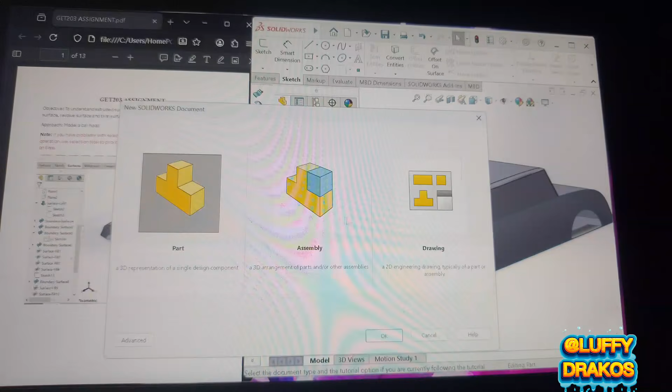So first of all we'll go to parts and click on this, and it brings a new page. This is actually what I'm modeling here.

Using the first instruction here, they said begin with the base, create the sketch below on the top plane. So we're going to click the top plane now, and create this sketch using a center rectangle from here. Click here, go to the center. Now we're going to dimension it.

1800 by 800, because that was what was given here. To use the dimensioning tool, you right click your mouse and drag it up, or you just come over here and click it. So 1800 by 800.

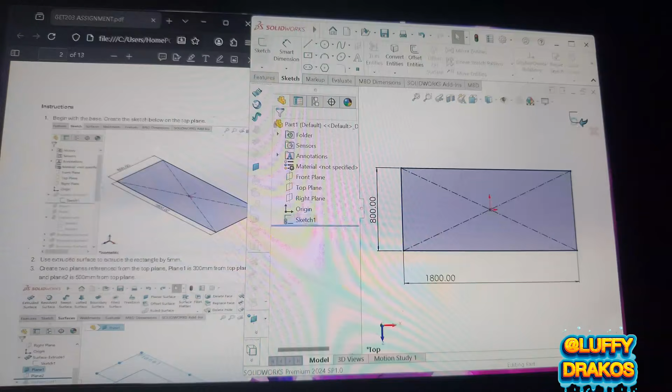Then click OK. Second, they said we should use extruded surface to extrude the rectangle by 5mm. So we're going to use extrude surface. First, exit your sketch, go to extrude surfaces, look at it here. If you can't find yours like mine, you simply go to your search bar menu and search for it. So they said by 5mm, and then you click OK.

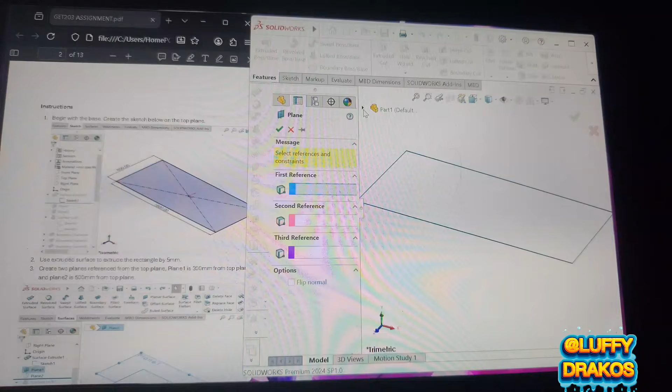Then they said create two planes referenced from the top plane. Plane 1 is 300 from the top plane and plane 2 is 500 from the top plane. So simply go to features, go to your reference geometry. I'm minimizing mine, that's why it's showing an arrow, but yours should just show reference geometry like this. Then you click on the arrow down, you see where the right plane, click on it. Then click on this arrow here, in parts, then scroll to front plane, in top plane rather.

Then see this point here, this is where you put your heights. So the first one is 300, you can just write 300. So this is how it looks like. Then click OK. Then do the same thing for the second time.

They said you're going to reference two times. Plane, this one is 500, so you just make here 200 from the top. So the total is 500. Since the first one was 300, click OK.

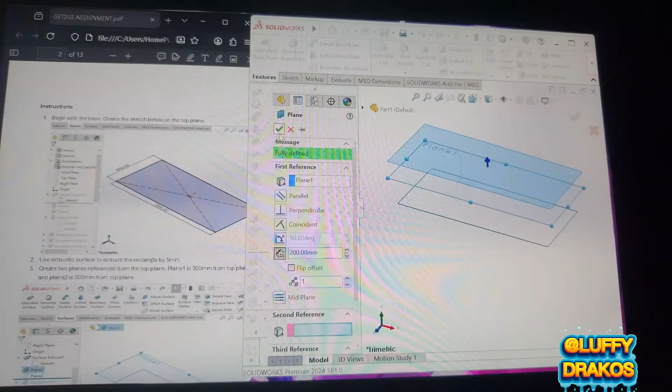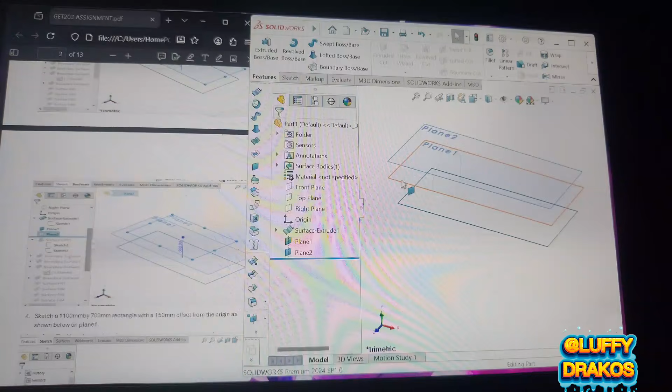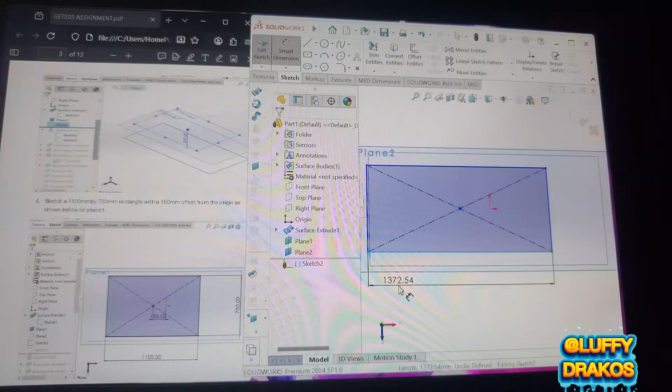So they said we should sketch a 1100mm by 700 rectangle from the first plane, and we should give an offset of 150mm from the origin. So we come over to plane 1. Watch what I did. I click on plane 1, click on sketch, go to rectangle, trace it to this origin. Make sure it's traced like this to make your work easier. So you dimension it 1100 by 700. Then the offset from the origin is 150.

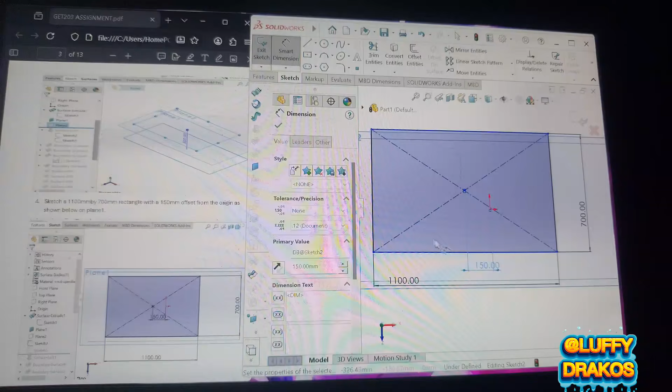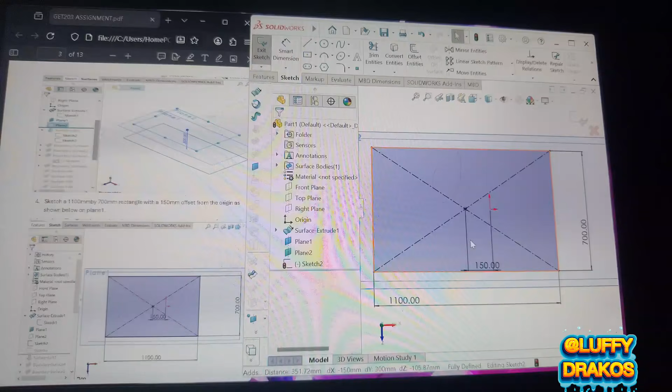Then before you leave, it's not fully defined, you have to make here horizontal. Click on this point, hold your control, click on the second and make it horizontal. Then you click on OK. Now it's fully defined, that's why everything is showing dark. So you simply exit.

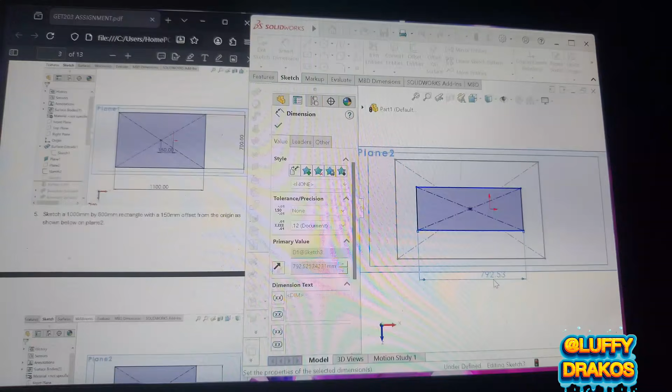And they said sketch a 1000 rectangle by 600 with the same offset of 150 for plane 2. So you simply come to plane 2, click on sketch. Instead of offsetting, since they are the same offset, come to this point here, draw your rectangle. You can stop yours here, then dimension here 1000, and do the other side 600. Let's confirm here 600.

So now it's fully defined. Click here. What's the next step?

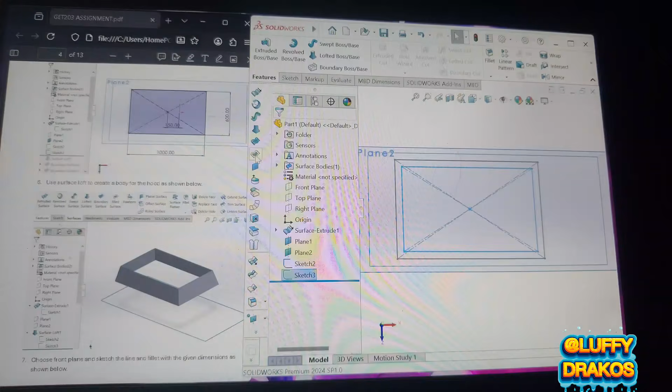So they said use surface loft to create a body for the hood as shown below. So you exit the sketch, go to surface lofts, which is this. If you can't find yours, just like mine, you search for it. Note, surface loft is different from lofted bodies or lofted boss base.

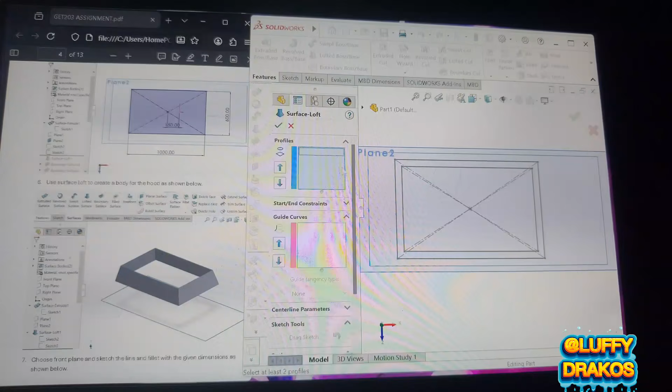So you use this, not that other one. Click here, click on delete this, click here and here only, and you have this. Then you click OK. So this is what you should be having, just like here.

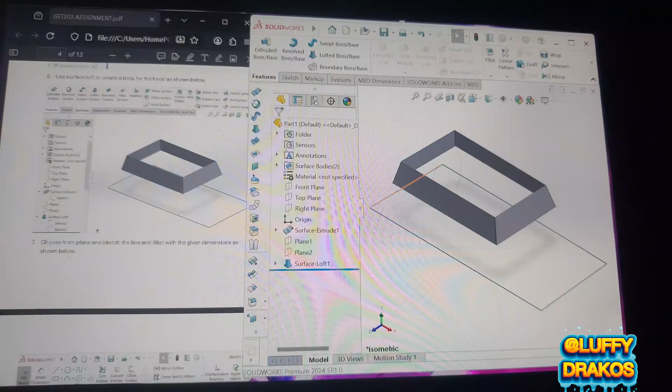So now to make these planes invisible, you just come here, click on them and click on this eye, and they become invisible. So now they said we should choose front plane and sketch the line and fillet with the given dimension as shown below.

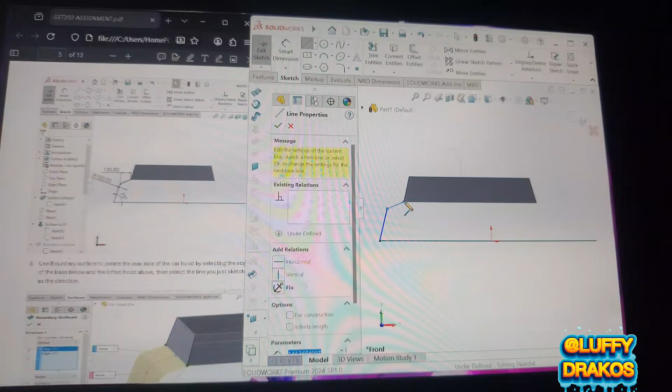So we're going to choose front plane and sketch, and we're going to do this line. I know this is giving a lot of people tough time, so here is the trick behind it. Pick your line tool, or you simply right click your mouse and drag to the left. So you come here, make your hand a little bit slant, then you stop, and then you connect it here. Then you dimension 135 from here to here.

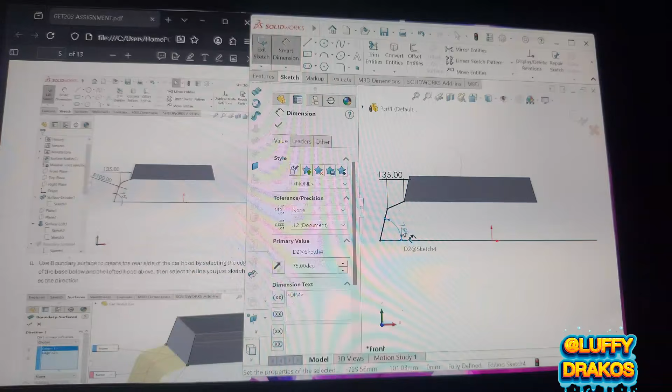And then the angle from here to the base, 75. See, mine is almost 75 though. Then you click OK. Then you come over here, your fillets, click on it, click on this part and make it 100, since it's a radius 100, and we have a fully defined.

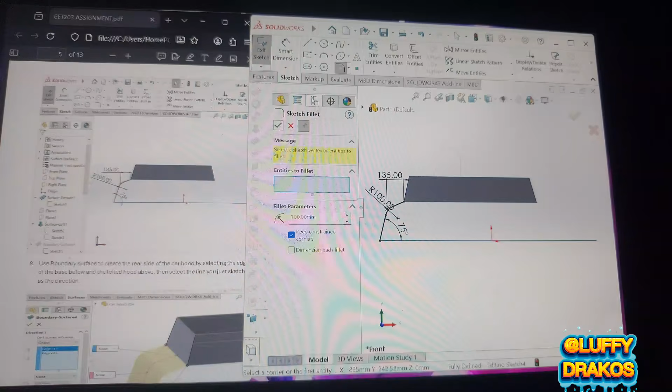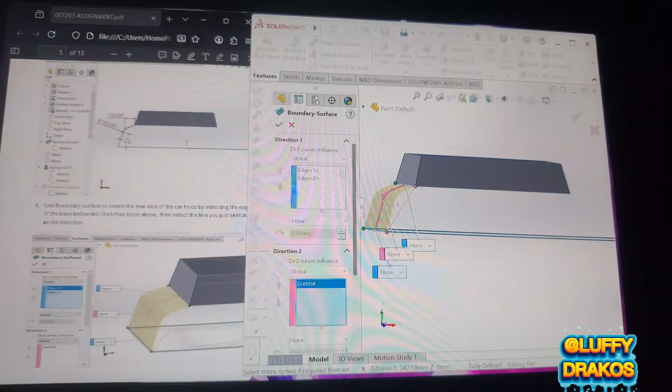So after this, you click on OK, and they said we should use boundary surface to create the rear side of the car hood by selecting the edge of the base below and lofted hood above. So you simply exit, come to your boundary surface and search yours if you can't find it. So you click on both edges like this and click on the line as its direction like this. Let me go over here again, turn it, go to boundary, click here, click here, then click here.

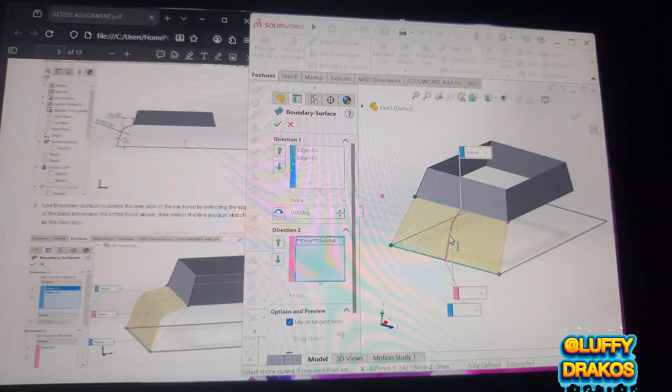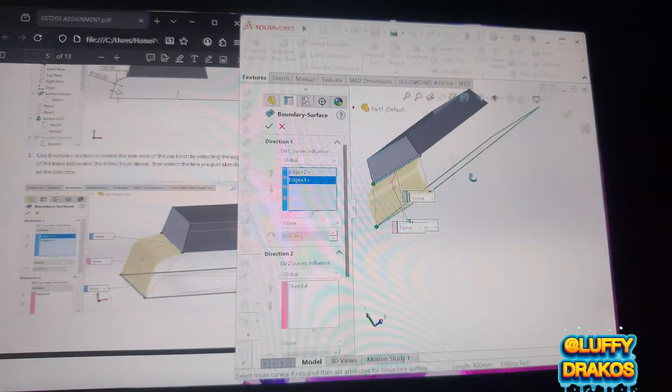So you click on this part for Edge 2, this base part. You have something like this. Then you click somewhere around here for Edge 1, and you have this. And look at what you have. Though you might face some challenges doing yours, why some people might find it as easy, but just try it.

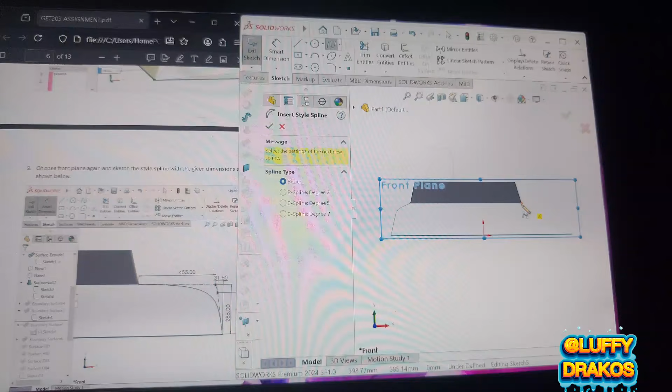Then you click on front plane again, edit sketch. This time we're going to use what they call a style spline as instructed. Then we're going to have something like this from this point. Draw a little bit downwards, click, draw a little bit downwards again, click, then final one, connect it here. Then you click on the escape key on your keyboard to escape it.

Then you start your dimensioning. I advise most times we start with the 31.5 from this point to this point, 31.5. Then the next one 285, which is from here to here, 285.

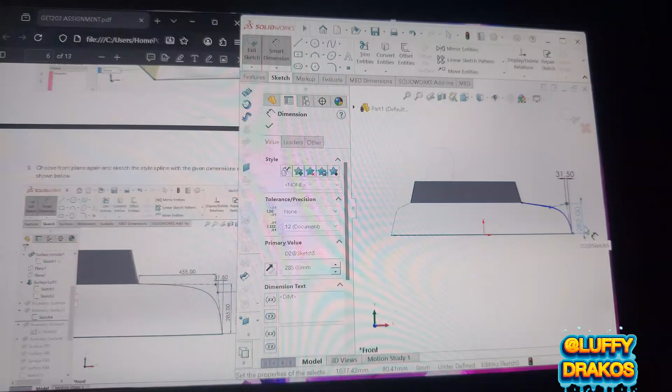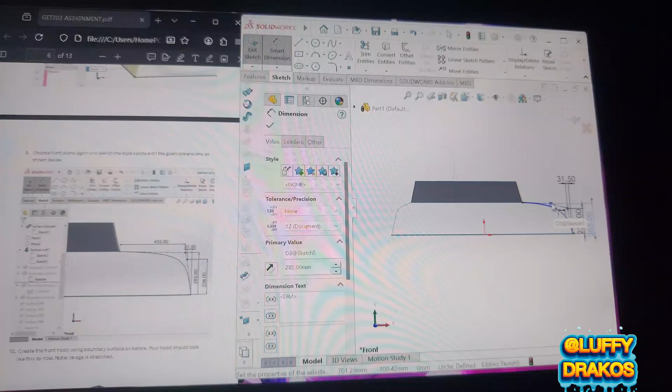Then the next, okay, 285 is not there, it's 238. 238. Then 285 is from here to this high one, 285. Then the final one 455 from here, or let's do from here to here, 455. And there you have it, fully defined.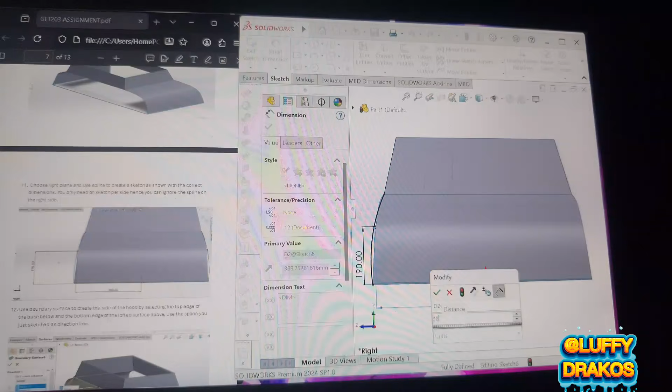So now dimension from here to here is 190. And from here to the origin is 388. Yeah, fully defined. So head over to...

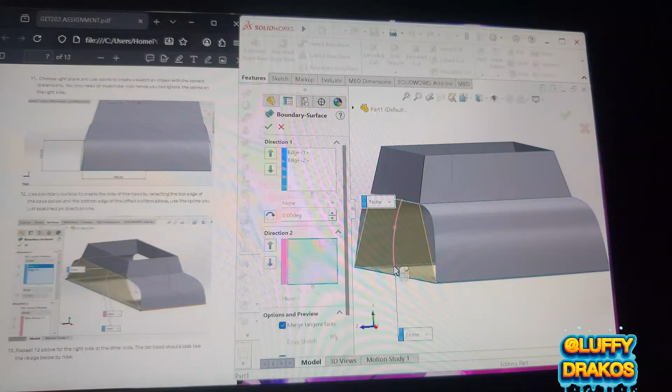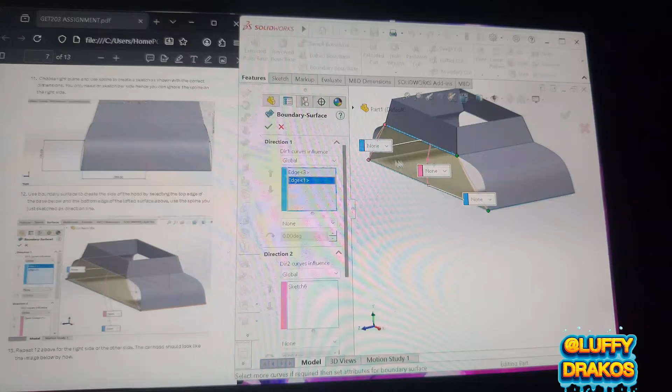Our boundary surface again, seed sketch, boundary surface, edge 1, edge 2. Don't forget to clean the sketch and put it under direction. Okay, we have an error, don't know why. Okay, I will delete this. And we do it. Yeah, and that's fixed. See, these edges can be quite troubling at times.

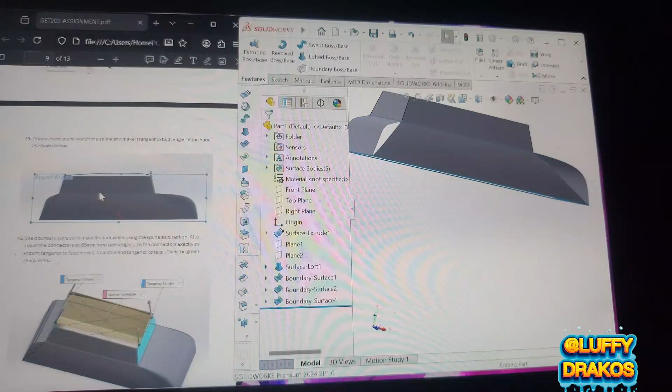So we have this. So before we do the other parts as instructed, I advise we do this tire. Okay, let's go with the roof parts first. By picking front plane, I'm also going to use a spline and make it tangents.

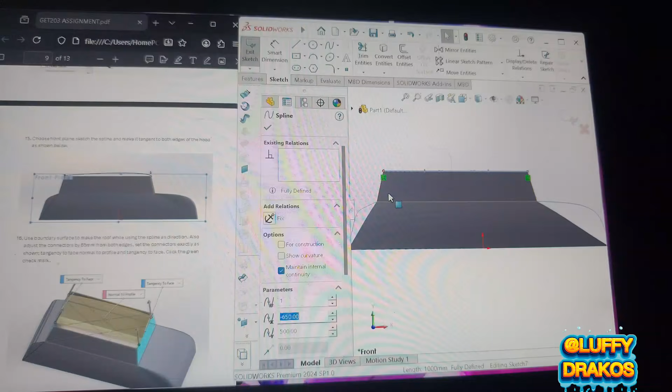As I noticed some of us do have problem with this. So you click on escape, then you click on the line you just drew. Click on the line you just drew. Hold your control. Click on the slant one. Add your tangents. That is one. Do it again. Hold your control. Click on slants, your tangents, and okay. Then you can draw here down.

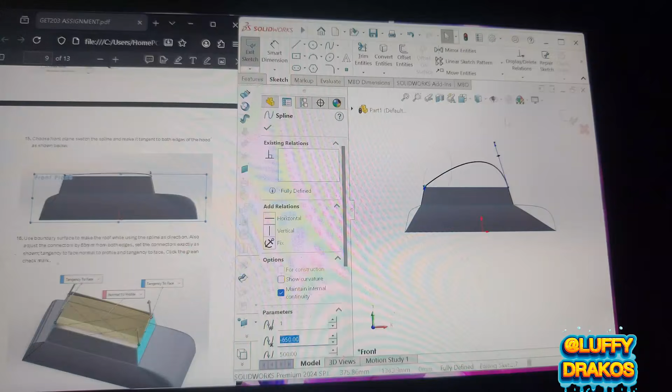Okay, here we have it. Can raise yours a little bit and click OK. So go to boundary surface again.

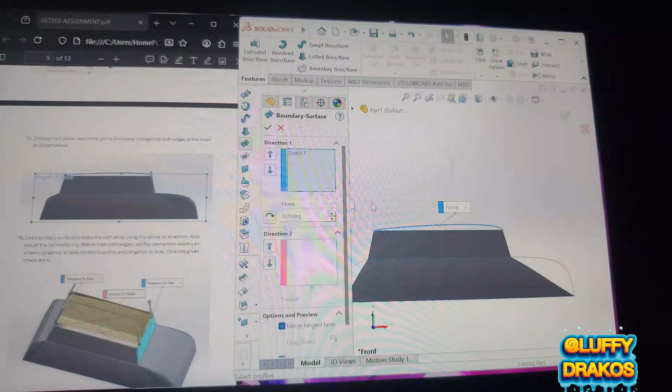One, two. Delete your sketch and click here. Okay, we didn't have a problem with this guy.

If you can see from the diagram, there's a little bit of space between the boundaries and the connectors. So we're going to press Ctrl 5 to see the top view, and we click here to slightly shift it away. Do the same thing for here.

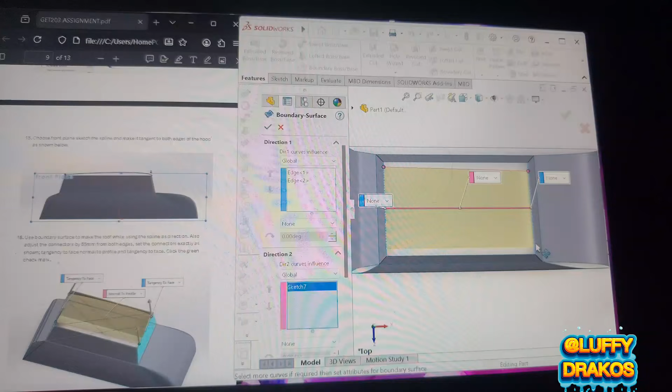Okay, we have this. So click OK. So to cover it up, simply head to fill surface. Remember, any tool I used you can't find on your toolbar, just search it, you're going to see it.

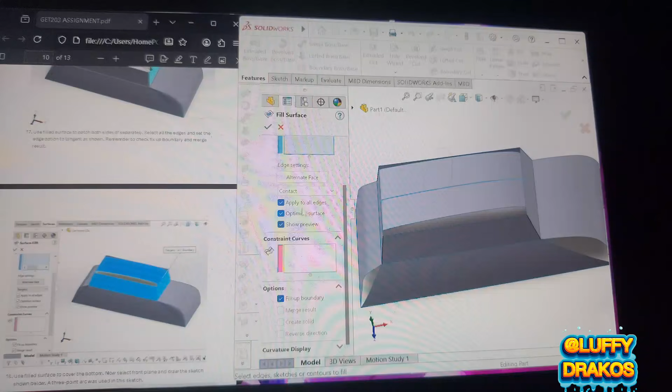Don't forget to put it on tangents and click on all edges. 1, 2, 3, 4. See, fix and merge results should be on.

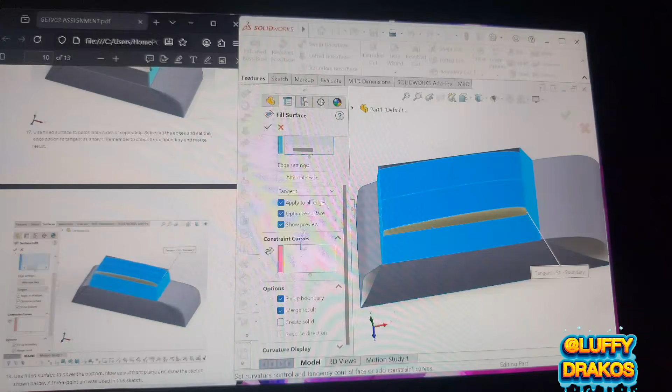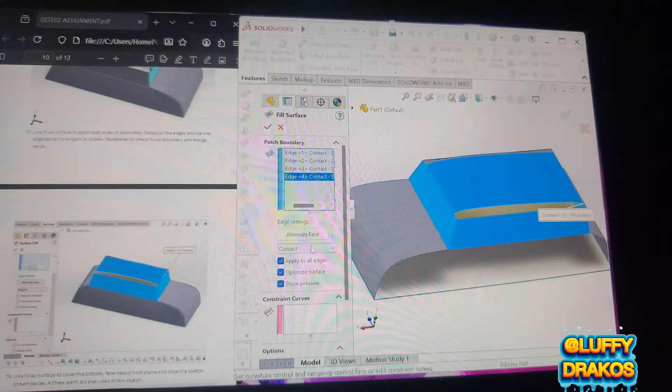Then yeah, that's all. Turn to the other side, click on same thing. 1, 2, 3, 4. Merge tangents, don't forget, and go.

So this is how your top should look like. So let's head to the tire parts. Pick front plane, 3-point arc. Same thing here.

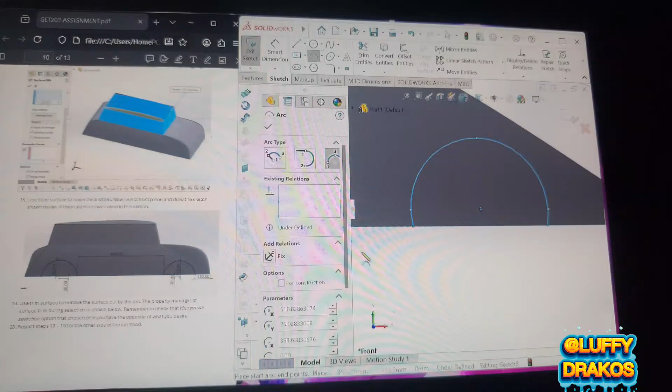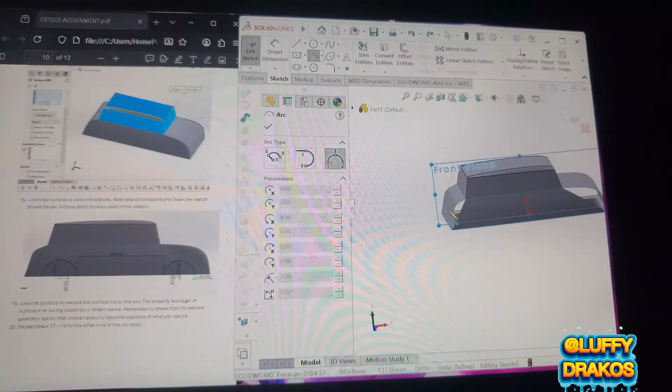Okay, seems to have done some error. Okay. 3 point. Okay, good. Control 6. Okay, and control 1. Yeah.

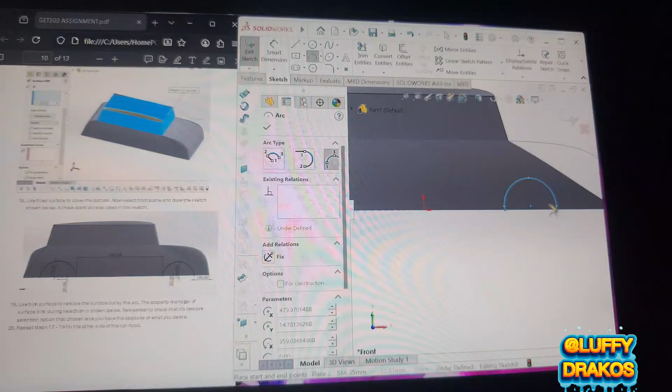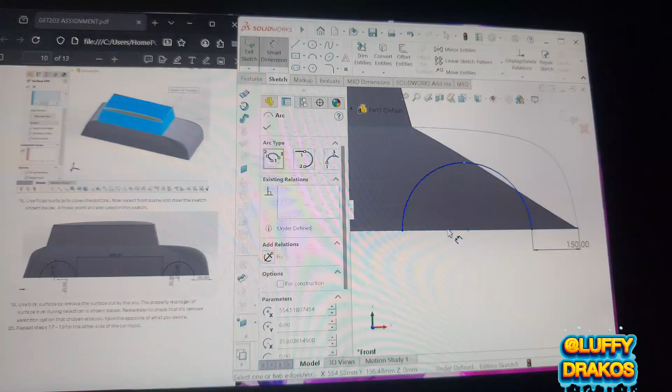Then dimension near 150 away. Then from this center point to this point, 155.

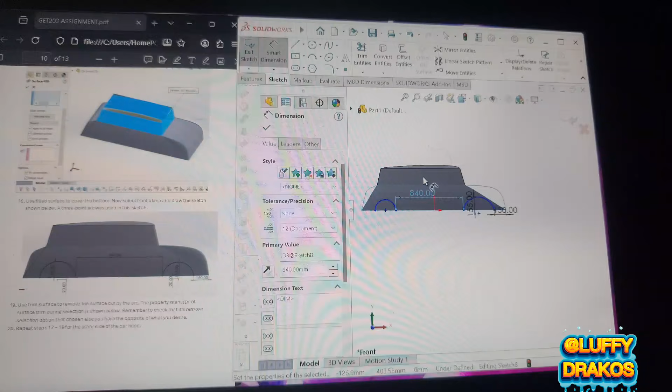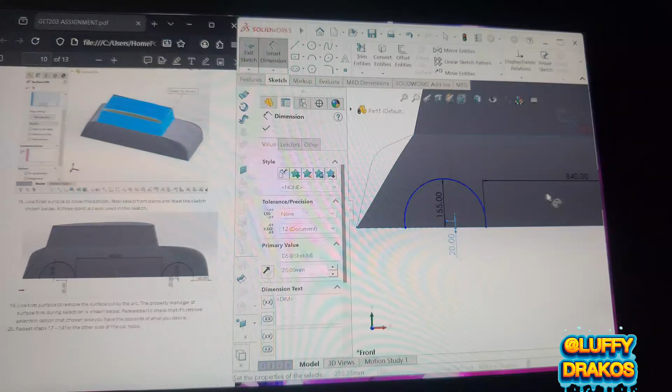Then here to here is 840. 155. 20. 20. Fully defined and voila.

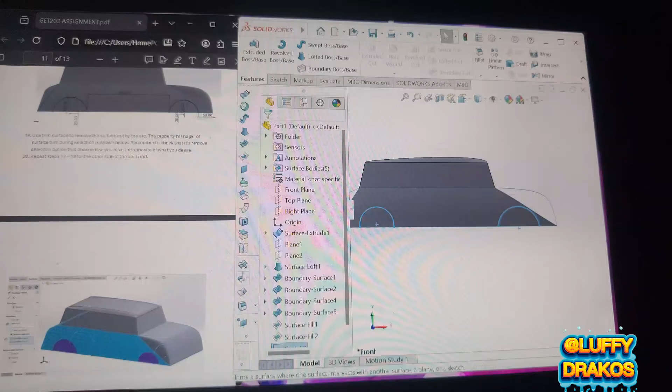So click on trim surface, this guy, select these places and click OK. You have this.

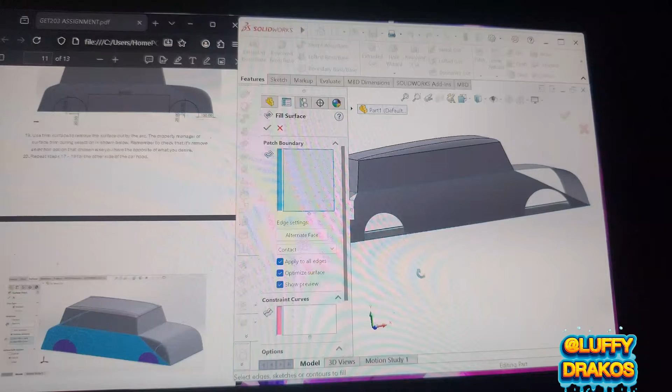So now we're going to cover the bottom using fill surface. Okay, tap on edges now. Oh god. So we're going to pick the edges, the bottom edges for the filled surface.

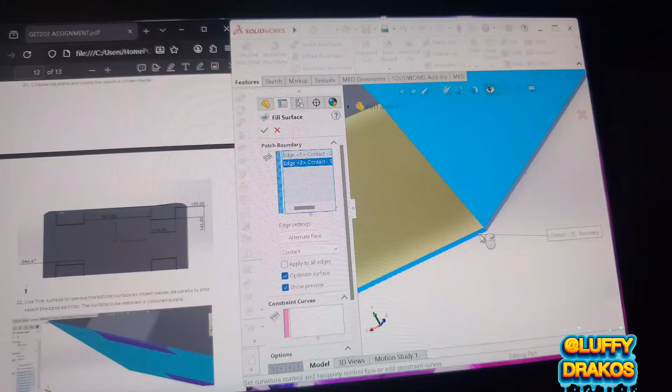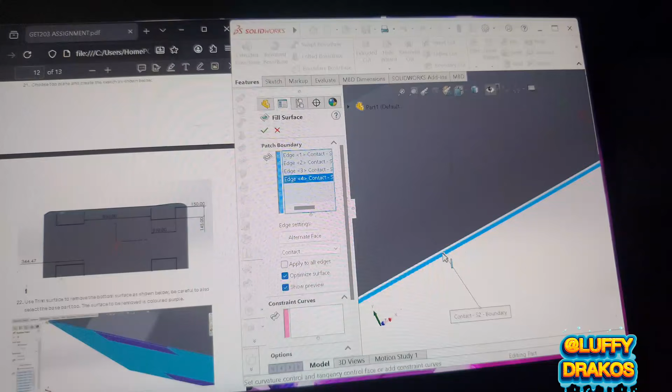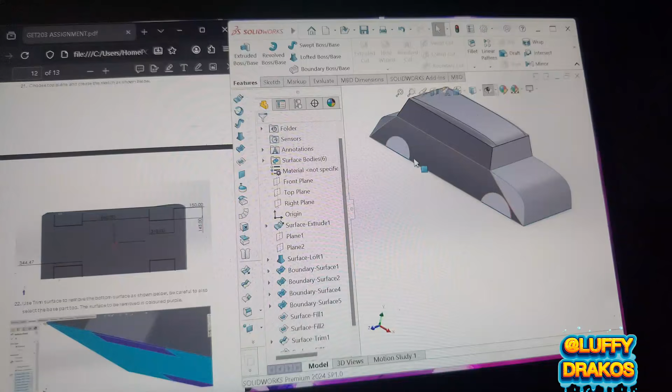1, 2, 3, 4. Seems edge 4 didn't suffice. Yeah, this is it. Make sure you click on the base edges to avoid errors while covering.

So now we're going to pick our top plane and sketch. I'm going to use Control 6, and I'm also going to click on save. I advise you save because sometimes this system crashes and that can be painful. So each step you make, I advise you save it.

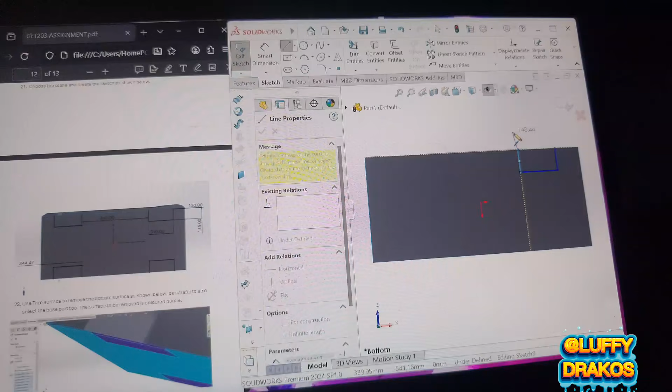So next up, we're going to dimension these 2 points 150 apart. Yes, 145. Then the second one, the distance is 40.

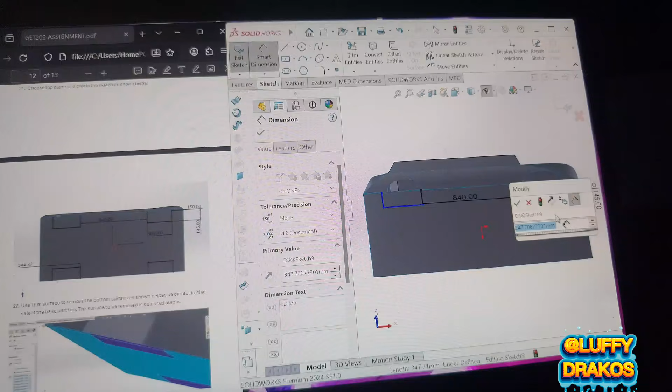So you see, kind of have some slight issues with the bottom not matching with the top. So I'm going to edit mine away from the dimensions given. Okay, let's make it 340 then.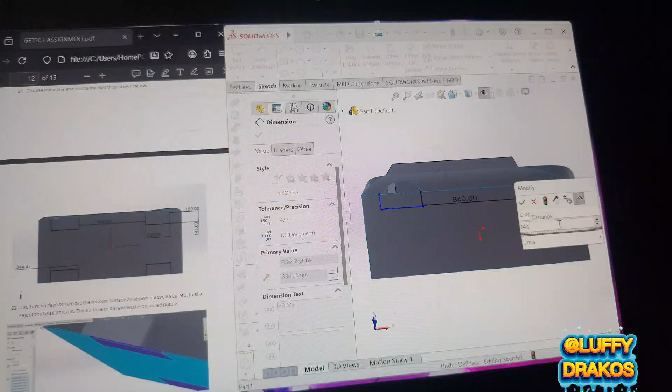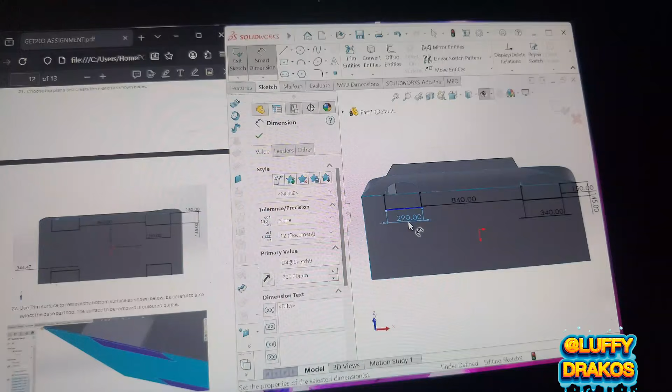I think this should do it. And here should be like 320. Mm, mm, okay.

And yeah, are equal. And just making a equal to, okay, can work. Something like this. Yeah, yeah, should be equal.

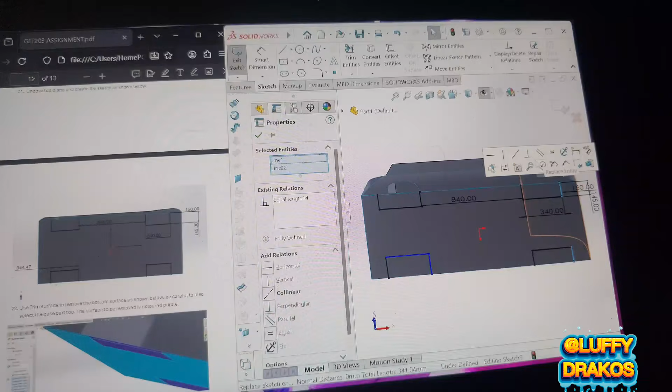So now we're going to make each rectangle equal to the top ones. Control equal to, control and equal to, same thing here, equal to.

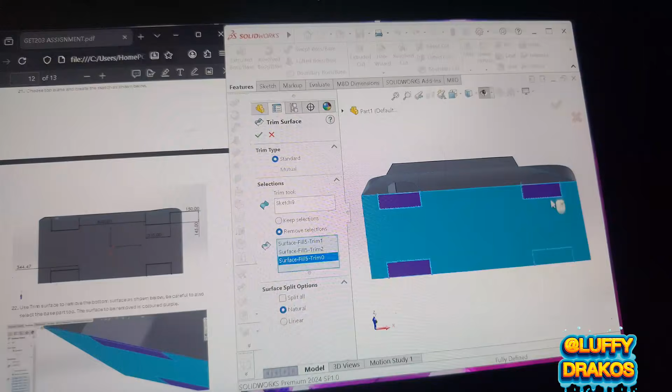And we have this. So we're going to use our trim. One, two, three, four. And we're removing them. So now we'll remove that. You can now fill these surfaces with filled surfaces.

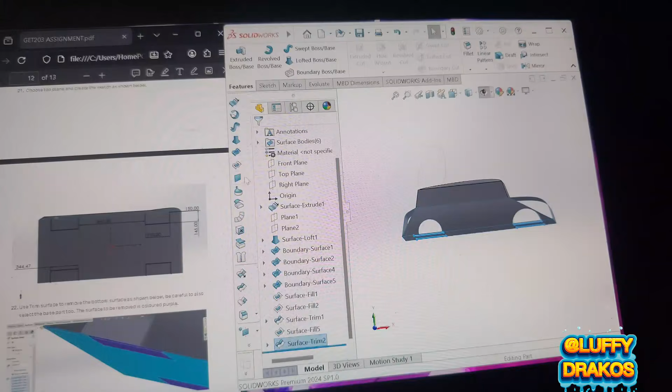Or first of all, let's mirror here. Mirror entity, click on this arrow, click on front plane, click on faces to mirror, click here and click on OK.

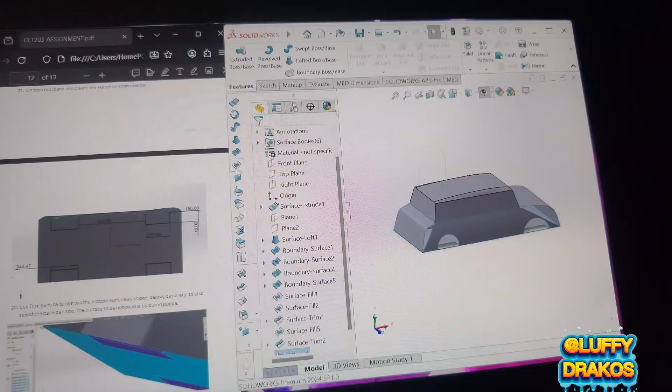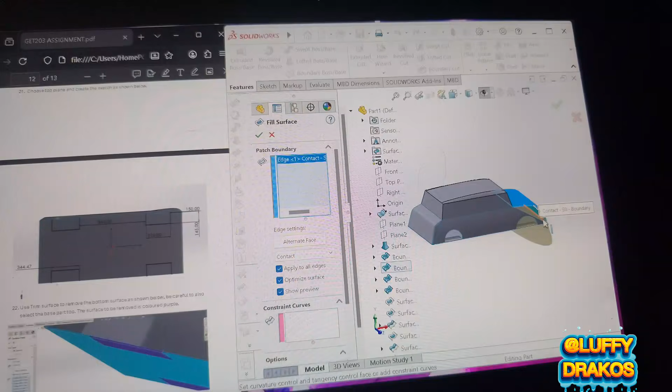So now we can now fill each surface. One, tangent. Repeat the process for all sides.

And there you have it. Here you have your car. Am I right?

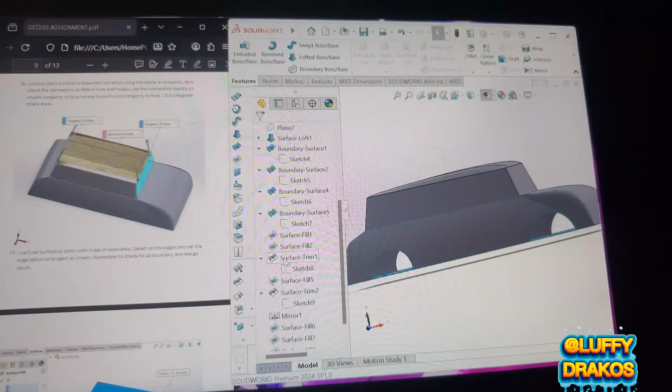So looking at this car, we can see that this bottom does not align with here. So let's edit this circle here by heading to our surface trim one and the sketch. Then to get the sketch, you just click this arrow, it's going to appear. You click on the sketch, edit.